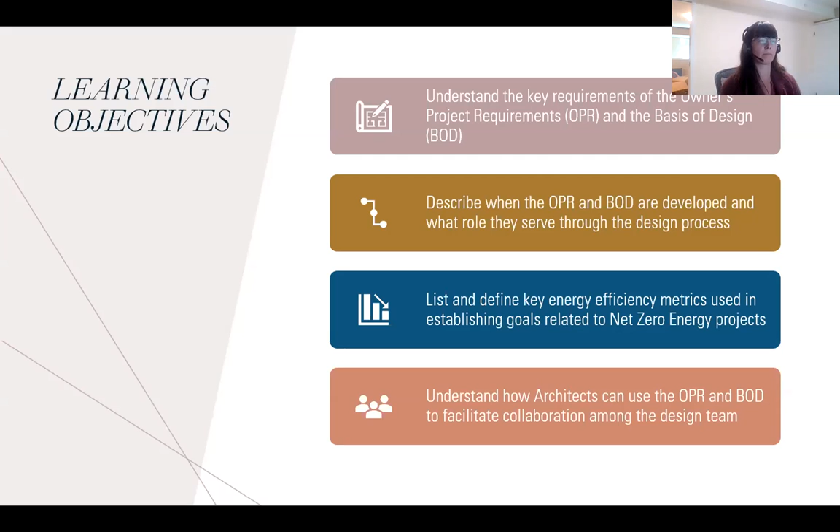I'm just going to briefly tell you about Janika's background. Janika has I think about 12 or 15 years of experience in the sustainable building industry at this point. She worked as an architect for 8 years, including at EHDD. She has worked on a lot of zero net energy and LEED platinum buildings, including the Packard Foundation, the Exploratorium, Andrew Science Hall at Pomona College. Prior to working at Integral Group, she had a position at the University of California Office of the President, leading efforts on climate action planning and green building policy and implementation. I could go on.

She's been at Integral Group for several years now, and Integral is kind of an engineering firm that does a lot of stuff beyond just engineering, and works with a lot of architectural teams and building owners to sort of tie the groups together. And that's really Janika's strength, as an architect who has a lot of interest in technical topics. She's really about getting the team to work together. So with that, I'm going to turn things over to Janika. She's got a lot of stuff to cover in a relatively brief amount of time.

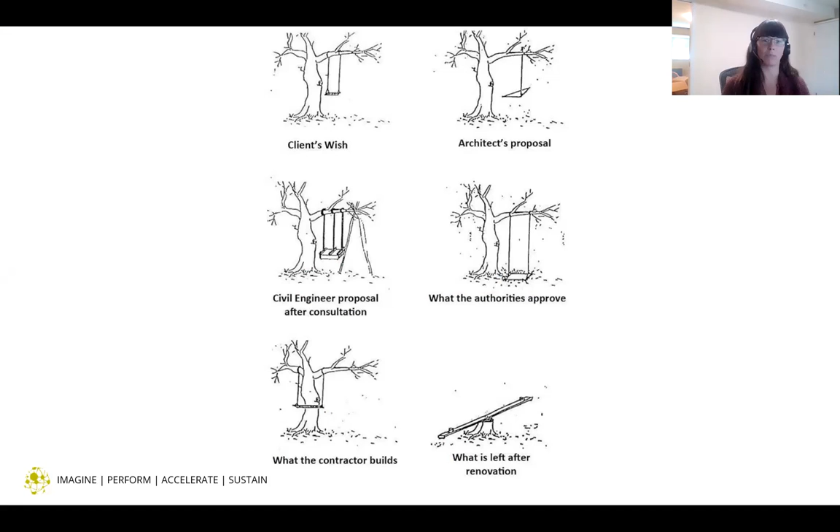And recognizing that projects today, there's so many pressures, pandemic aside, there are already so many pressures on our work in terms of cost escalation, just the system complexity. We went from having a basic internal combustion engine, to use the car analogy, to now smart cars with all kinds of computers. Buildings are very similar. There's just so much complexity to buildings now. How do we actually make it happen in a realistic way?

There's more and more third-party certifications. Sustainability goals have gotten more aggressive, thankfully, but also more challenging to meet. And schedules are getting just more and more compressed. I'm just shocked working with architecture teams now on projects to see how little time there is to actually do the work you need to make good decisions. So all of these pieces make integrated design actually even more valuable.

And really, integrated design is simple in its sense. It's bringing together experts in multiple disciplines from the very beginning of the project. That's key. Want to start as early as possible to identify and achieve shared project goals through collaboration. We're not talking today at least about integrated project delivery, which is IPD, you may have heard. It's a very specific sort of template and process that's used for especially complex projects. It's similar, but has more of a structure to it in terms of how it's actually done. But there's lots of resources out there if you're interested in finding out more.

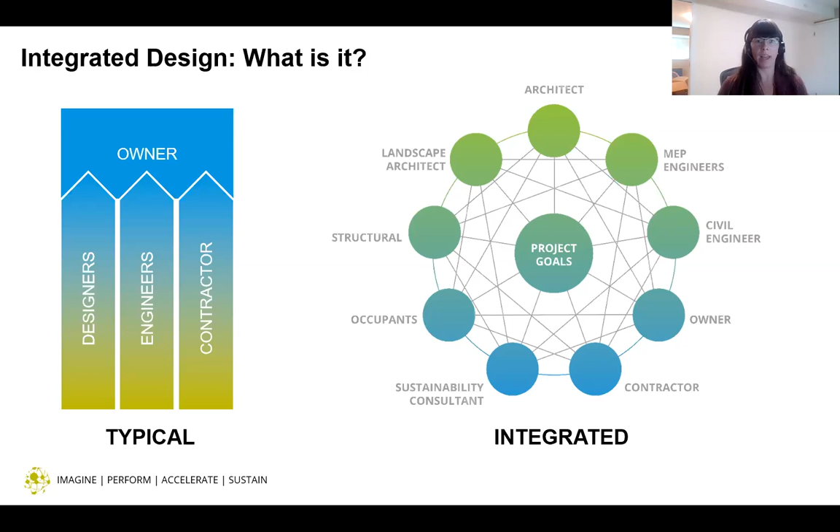And sort of characteristics are that this teaming is really highly functional, aligned around these project goals, that the collaboration is happening in a fruitful manner, that there's lots of iteration and feedback loops, so that we're not just all going on a straight up trajectory to the deliverable, we're actually acknowledging at certain points, oh, we need to investigate more. So I think architects are really great at this. This is what we're trained to do, we don't have a linear path to a solution.

We go around and around, and it's really inviting our consultants in and our clients into that process as well, so that all aspects of the project, or the major aspects of the project, can have a similar kind of iterative approach. So you're really finding the best answer, best solution for the project.

And when you look at, especially for high achieving projects, if you're pursuing net zero energy, for example, there are so many factors in here that just require a more engaged collaborative team. One discipline can't figure this out on themselves. The MEP engineers can't figure this out for themselves. It needs collaboration with the architect, with the owner, with landscape, etc.

And at least from our perspective at Integral, we're really looking to do more with the building, which is great for architects. We're trying to shift cost from mechanical and electrical into the architecture, because the architecture really is the first mechanical system. If you can design the envelope and the building well enough to reduce the load enough, then you're essentially taking pressure off the mechanical and electrical systems to do the work of heating and cooling or ventilating your building for you.

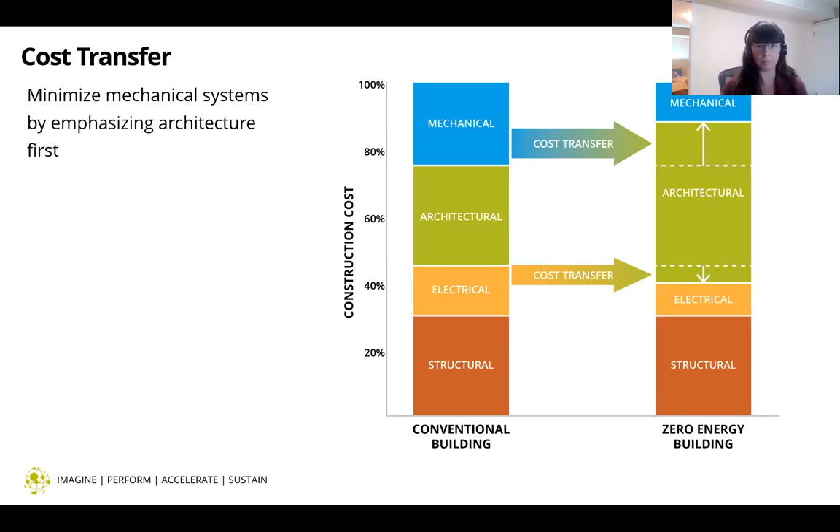So by having an integrated design process and some higher performance or sustainability goals, you can really start those conversations at the early phase to figure out what are the key strategies that the architecture can do to make that happen. Another key component of integrated design is to look at the whole design process for opportunities to use analytics and use your team to inform design decisions.

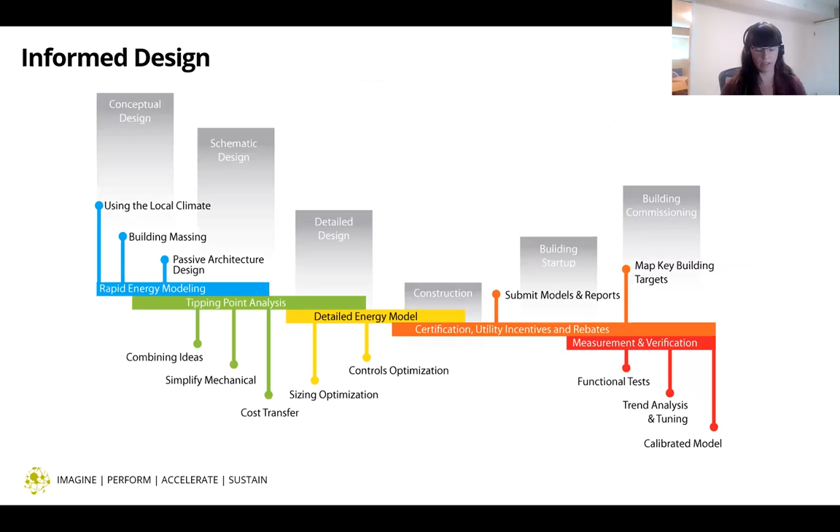So especially when it comes to energy modeling, we often see that the sort of traditional MEP work happens more in design development, construction documents, that maybe early on in concept, there was a shoebox model or something that one of your architectural staff was able to pull together to look at shading or orientation or something, but then it kind of drops off, and then really in DD and CDs, you're just looking for compliance or looking for an updated LEED model, that the energy modeling at that stage isn't informing the design.

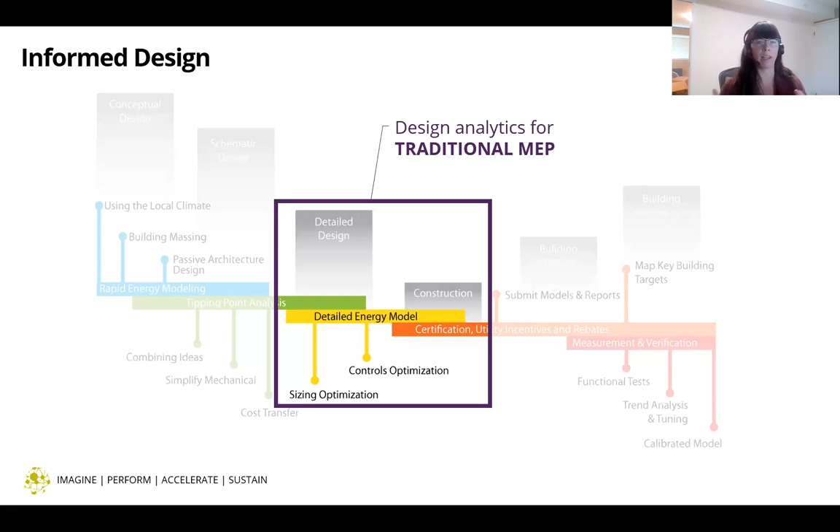But what we're looking for with an integrated design process is to use your analytics capacity in your team to test ideas throughout design, not just in concept, not just at the end before permit. It's a small upfront investment if you can expand that scope compared to the mistakes that can be made by committing too early or too late to a bad idea or finding out in construction documents that your whole shading scheme doesn't work, or

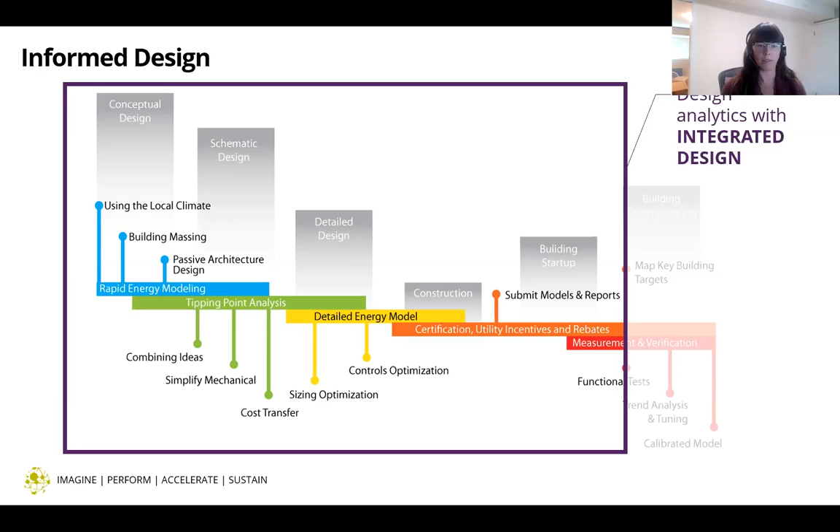I'm trying to think of another example, but it's super useful if you can at least build in concept and SD and DD an iterative approach to modeling. So it's not just compliance, you're really looking to solve problems. So I just wanted to share an example of that, where we worked with an architect client in the Pacific Northwest who had this shading scheme that was quite complex. It was part of their design intent, but it was also serving a purpose.

We knew this particular jurisdiction had really aggressive energy use intensity targets for each project, as well as thermal energy demand intensity targets, which means that we had to really watch how much solar load was coming into the building and what the heating demand requirements were for the project.

So we had been assuming the shading component was part of the project from the beginning in order to meet these city requirements, as well as integrating it into a natural ventilation and radiant ceiling approach. So it was all very much layered and nuanced in the design.

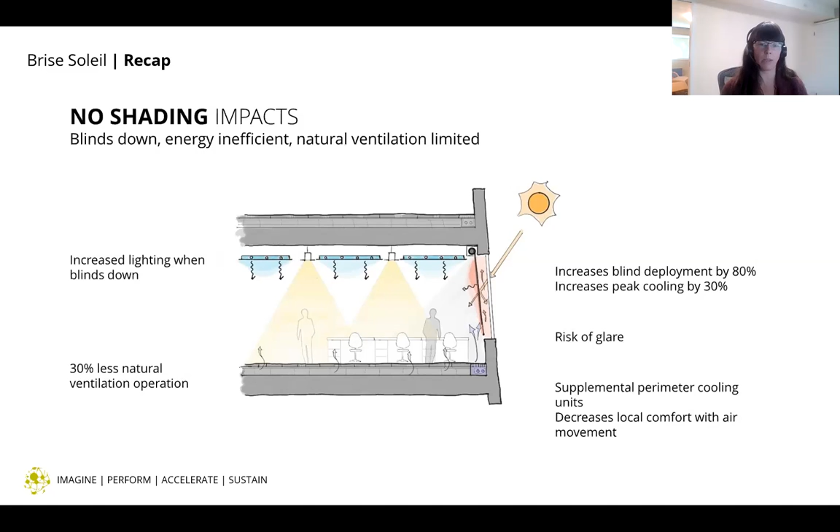But at a certain point, because of VE and client concerns, we had to really demonstrate that the exterior shading component was doing why it was needed, essentially. So we used the analysis that we'd already developed to try and develop a story around why it was so important and explain how all these nuanced layers of the building and its systems were so necessary.

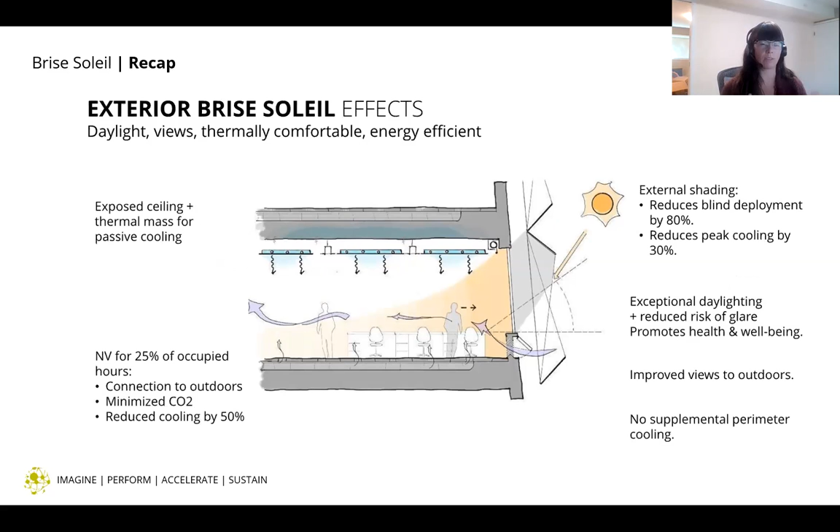So we use diagrams a lot. We try and explain in a more narrative fashion how the different pieces of a building work together, and then also used just the metrics that we had available of what the impacts would be to the building on the cooling load, on how often the blinds would come down, how that would affect views and daylight. So some of these more qualitative experiences of the user, how it would impact our natural ventilation scheme, and then what the impact would be to the mechanical systems.

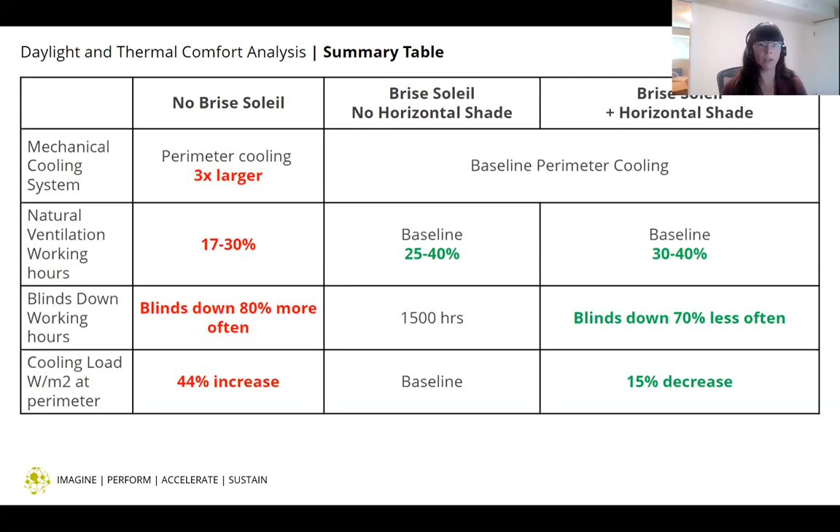So if we didn't have the brise-soleil, for example, the perimeter cooling would be 3 times larger. So that has a cost impact. Then we also used our daylighting analysis to help tweak the exterior brise-soleil system so that they had this module that kind of replicated over the facade, but it wasn't tuned to orientation. And the shape of it was causing some glare issues for users.

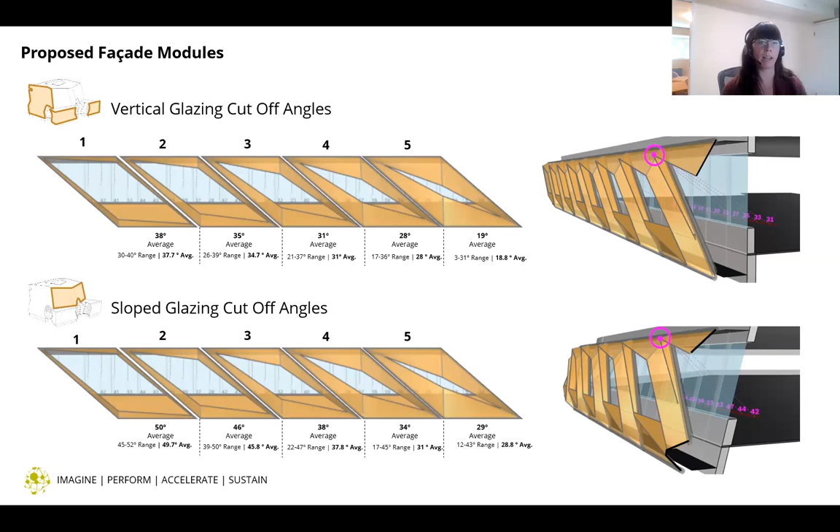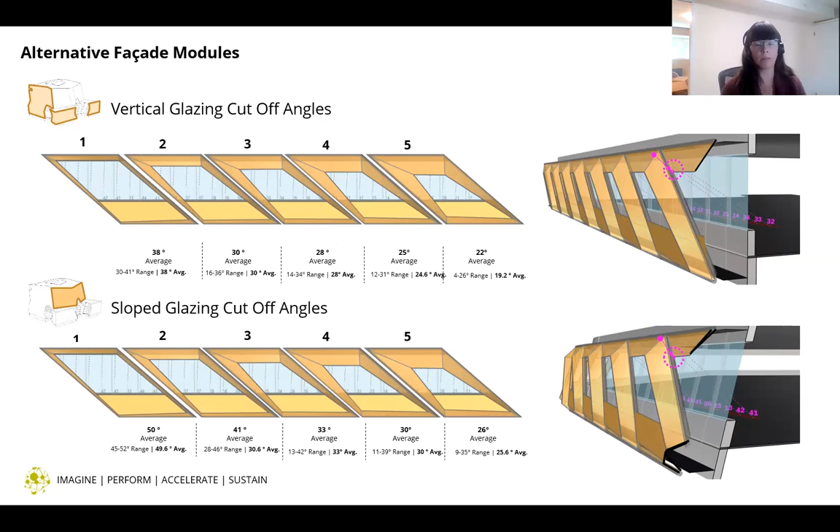So at the same time as we were reanalyzing the facade to make sure it worked for the mechanical system, we also reviewed the daylight and the thermal comfort component of the brise-soleil. And we were able to come up with some suggestions of how that might be tweaked to better perform for the architect to consider, as well as how it could be rolled out on the facade in different ways.

Because on the east facade, we had more flexibility in terms of what shapes would really work, how much sun you could really let in and still get the right performance that we were looking for. But that was going to be different than the southeast facade.

Sorry, I have multiple screens, so I'm going to look at another screen for a second, where you all are.

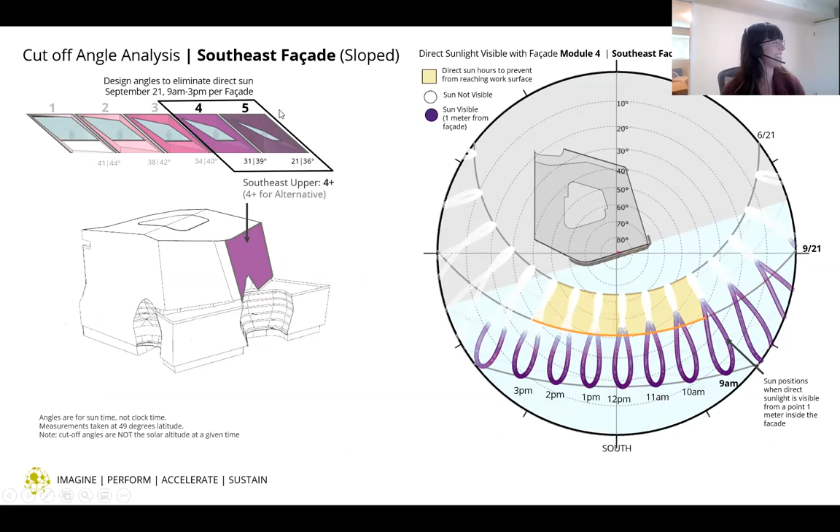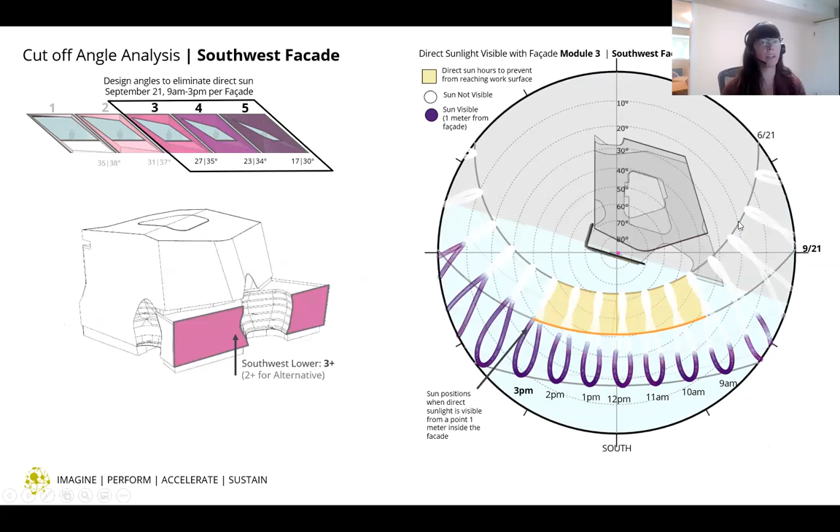You can see here that these 4 and 5 modules would be great for the southeast facade, but on the east facade, we could have more. And then it would be different on the southwest facade. So this type of analysis in DD really helped the architect tune their solutions to not only meet the client's need to understand why this was important, but also to get the facade to work as best for the project as possible.

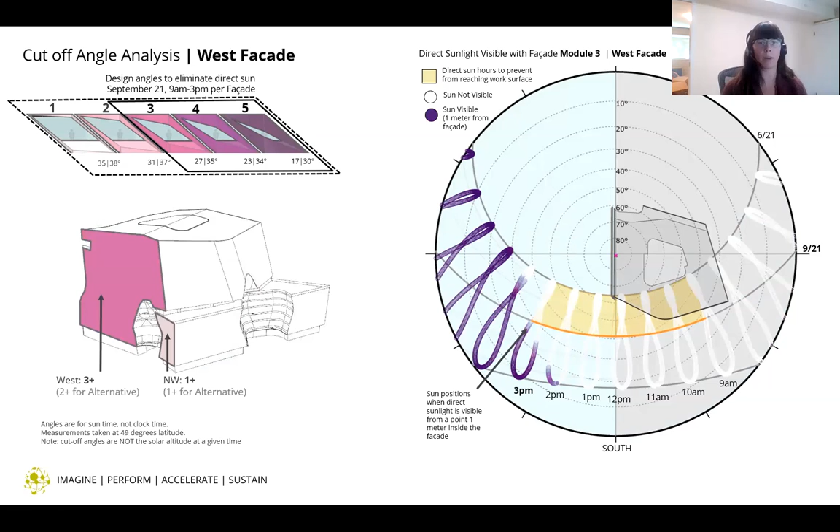So ultimately, it's trying to use the tools and the information you have available to describe how everything works together so you don't lose your design intent, either from an architectural perspective or from mechanical, electrical, plumbing's perspective, or even landscape, civil, all of our other consultants. I'm certainly speaking more from the engineering and architecture side today, but there's lots of ways in which these same principles apply to other disciplines too. It's just, how do we describe why we're making these decisions in order to justify them and to help everybody understand the implications for their disciplines.

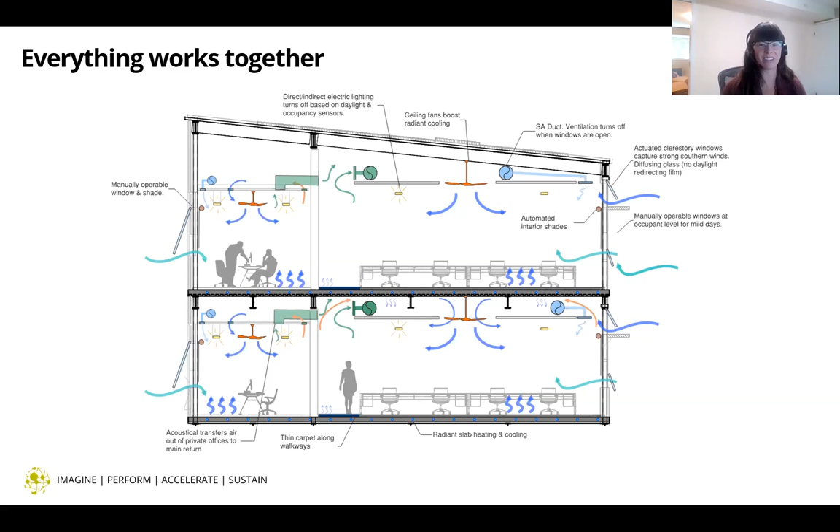And in terms of how to do it: architects as conductors. I think that we are in an excellent position to know when to lead and when to support others in leading. If you can tap into the unexpected enthusiasm about an issue that comes from a consultant team that may not have direct control over that particular scope, but has a real interest to help lead it in resolving it, that can be a really useful tool. So essentially empowering others to lead on resolving an issue.

You as an architect have the broad brush scope of understanding what all these pieces are, so you can help find the value proposition for clients and advocate for that additional scope for the analysis you might need, or for the piece of the design that is more complex but exciting, that has real value to the project. Find what the value proposition is and advocate for it. Use your consultant team to help fill that in and flesh it out for the client or the contractor.

If you don't have an example yourself or don't know, find the consultants that do. So if you haven't done a higher performing project before, but you really want to, find the consultants that can support you in doing that and are used to working in this kind of iterative way. And so as an architect, you know who to call on, who to bring together. Really importantly, what questions to ask, where the gaps are in the design, and how to follow up.

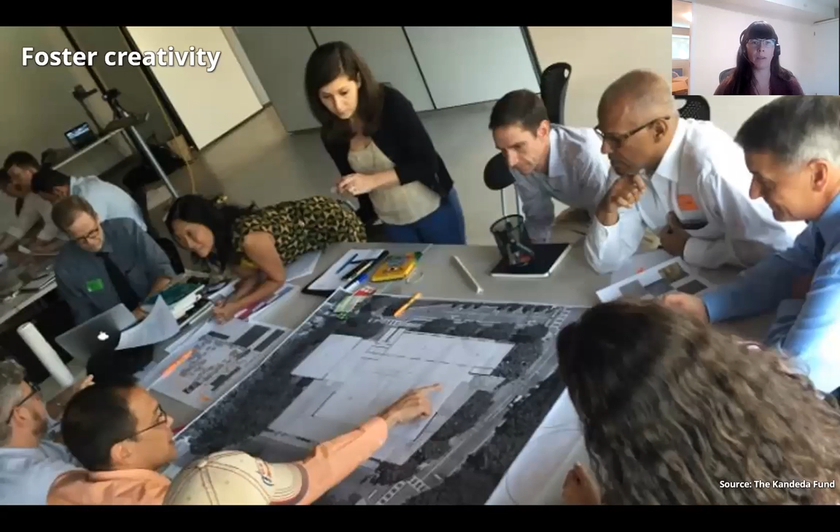So it's a mix of project management as well as sort of lateral thinking that I think architects can really drive the integrated design process in an effective way. It's also super important to set up a team culture within this project team that fosters creativity. So not only within the consultant team, but obviously within your own design teams. Just how do you think more creatively and more deeply about a project and potential solutions?

That you're holding everyone responsible for success. So there's no void of responsibility. So figuring out what is the scope of the project, what elements are going to be really championed by who on the project, and helping others feel empowered to step into gaps too. That you really want team members to feel like they have a voice regardless of their scope, that they can bring best-in-class ideas even if they're not the prime consultant.

And some way to reward the innovators. And sometimes that's as simple as just talking them up to the client, or just saying that Julie had this great idea on a team call. Just giving them acknowledgement can be a huge lift to team members feeling like they can actually contribute in areas where maybe they wouldn't typically.

And I think a great example of an integrated design solution that just requires a different approach than business as usual is something like alternative water sources. If you're looking at a site and wanting to integrate some alternative water reuse system, you have rainwater, which is civil, landscape, architecture. You have obviously plumbing if this water source is going to be coming into the building. You have the owner, which has implications to how occupants might interact with it, or maintenance considerations.

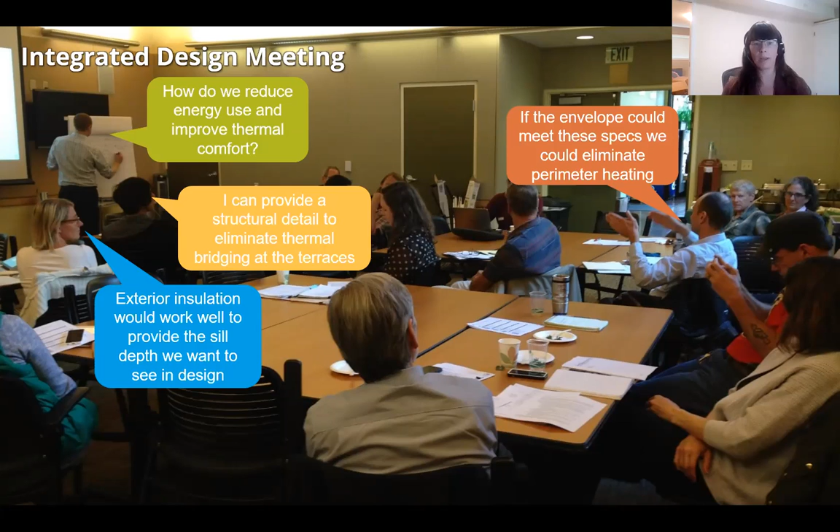And I just threw these in here in terms of tools for online collaboration. I'm sure all of you have a lot you could offer and what you've learned that works and doesn't. But obviously this is a lot harder to do in a virtual world. Especially for these more complex meetings or workshop-y kind of topics, I require that all team members use video. I really try and keep meetings small or use breakout rooms. I like, at least in the Zoom platform, to have 12 and under participants because that's just one screen gallery. So if it's possible to keep your meetings smaller, break up larger meetings into smaller components. Don't go more than 2 hours because people get exhausted.

And to really call on people. So go around your virtual room and make sure everyone contributes more than once, ideally, and find collaboration tools that work. One of the benefits of our new virtual environment is all of these amazing tools that are out there. And I'm not advocating for Mural or Miro in particular, but they're just examples of online sticky boarding, brainstorming tools that can really help. And you can have an interactive component as part of that. So it's also a great way to document the process. But no matter what, keeping clear notes about how especially these virtual meetings go is super important.

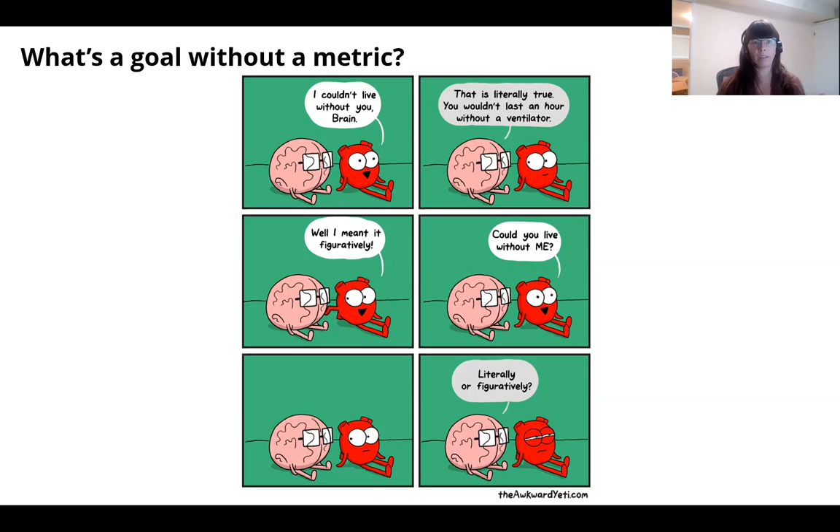Zero energy is a metric. We want to have an annual net zero energy for this project. That's a goal and a metric, as much as can be written in the OPR, but then also in the BOD to explain how the project is going to be evaluated for success ultimately, and to measure whether the design is actually meeting the intent of the project.

So it's important, because integrated design means engaging the team in a different way than business as usual, which means using these tools to your benefit. It's also really important to leverage the role of the commissioning agent early on, so that they're not just coming in late to sort of clean up the pieces with the OPR, but they are informing the basis of design and the systems as much as possible early on.

As I mentioned, it helps orient new team members and document design decisions and protect from value engineering. So this is especially important for the high performance projects or the highly sustainable projects that you have something that describes why the design is as it is.

And why does it never work that way? They're not typically bid documents, although in some contractual organizations they actually can be, but there's murky ownership. It's unclear who actually owns them. It's time and money. It's additional work for the team to actually do. They're not riveting. It's really hard to get excited about writing a BOD narrative.

Projects, again, take years and people come and go. So something might get started and then it gets dropped. They can be way, way, way too long or way too short and too vague. They don't get updated. They're written too late in the process, so it did not have any benefit. And the language is really generic.

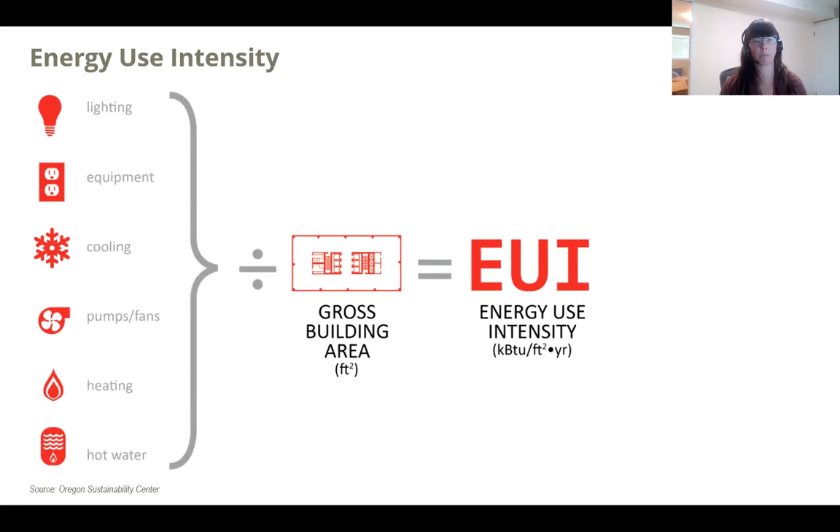So with an EUI, you're looking at the whole building energy use. So not just what's covered by code, but all of the uses in the building, including your plug loads. So my phone plugged into the wall, the printer, the monitor, etc., that wouldn't normally be captured by code is captured in the whole building energy performance target. And this energy use is divided by the square foot of the building to give you a measure of how this building is performing that you can then benchmark to other buildings.

So how we use that in design is by taking benchmarks from other buildings that the client might have or that we might have worked on, comparing to code, comparing to a LEED baseline energy model, comparing to a net zero energy target that we might have, and then where we think the project could go. So we typically break that out by end use and end use energy use, and start to see, well, heating's our dominant demand, so we really want to target that. Or lighting maybe is the problem, whatever it might be. Doing this kind of early analysis can really reveal where the opportunities are and where your potential targets might be.

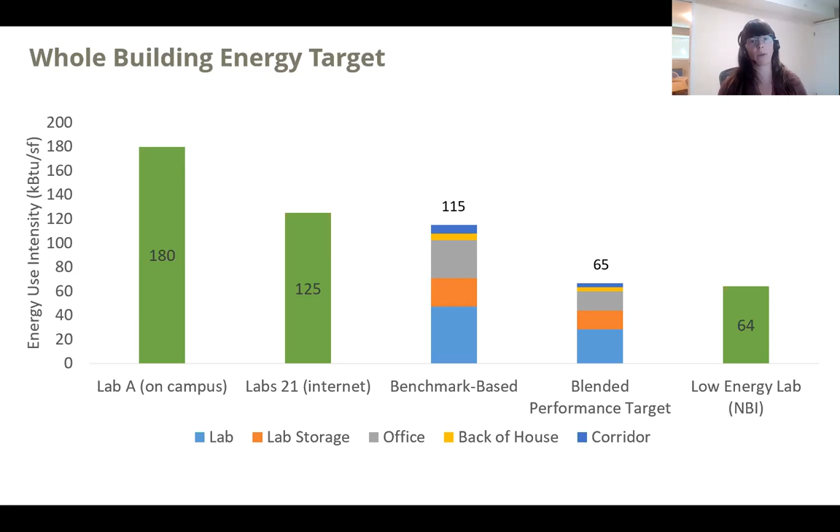And you can do this in concept. As I mentioned, there are lots of tools out there that can help you at least do a rule of thumb. Where do we think we can go? How far can we go on this project? So there's lots of places to find a benchmark EUI. The Architecture 2030 Zero tool is a great way to do that. Energy Star Portfolio Manager: both of those tools use CBECS, the Commercial Buildings Energy Consumption Survey, which uses existing building energy use data and compiles it by building type.

And you can change the levers to say, I have a 20,000 square foot building, it's a K through 12 school, it's open 5 days a week, etc. You can tailor it a little bit to then get a potential energy use target. And with Energy Star Portfolio Manager, you can set a percent of benchmark that you want to achieve. So for Architecture 2030, I believe it's 70% of benchmark. It's a little confusing because it's backwards, but that means it is 30% of the benchmark value.

So all of these different tools can help you at an early stage, and anybody can do this. Architects can look up an EUI and get a sense of what you might want to target, but clients can too when you're looking at an RFP. It's especially useful if clients have existing buildings to benchmark and then set a target based on that. The University of California has done that. The state of California has done that. We have a number of commercial clients that we've worked with to develop that specifically for their portfolios. So wherever you can gather the context of energy use for a specific building type, that will help you set your goal for the next project.

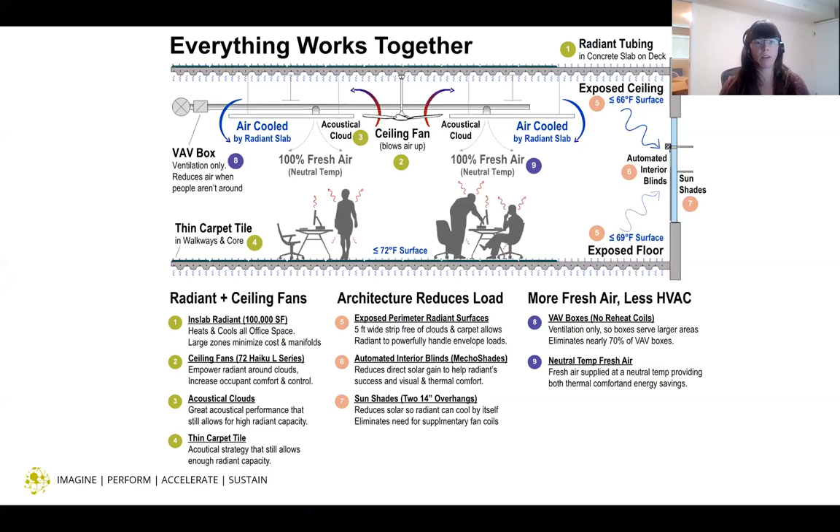And that also required a set of meetings with different consultants or different team members to help inform the performance of the radiant system, because the radiant tubing goes in the structural slab potentially. So how does structural approve of that? And what do they need in terms of information from us about tubing placement, etc., needs to be discussed early in the phase.

For acoustics, for radiant systems, you typically need to have the radiant surface exposed to the occupants, which means if it's in the concrete floor, ideally you don't have carpet all over it, or you just have carpet in strategic places, because the carpet dampens the effect of the radiant system. You need to talk about that with acoustics, because obviously carpet and ceiling clouds, etc., are important to maintain good acoustic quality. So how do you actually find a balance there?

For the envelope, you want to limit solar gain, especially in the climate zone of San Francisco, where the project was. So, what is the facade going to be? How much window to wall ratio? What external shading is going to be possible? What is the glazing type? Need to work on the modeling of that to understand the implications for the radiant capacity and whether it can meet the demand of the load for peak cooling loads, etc.

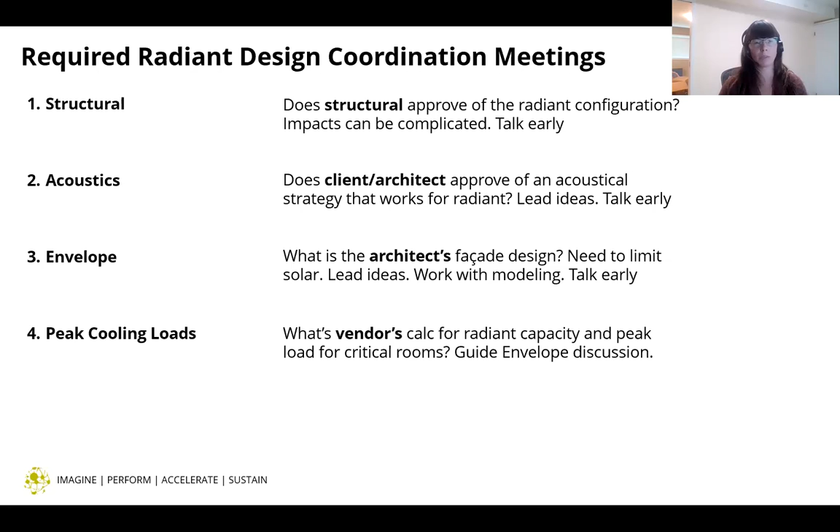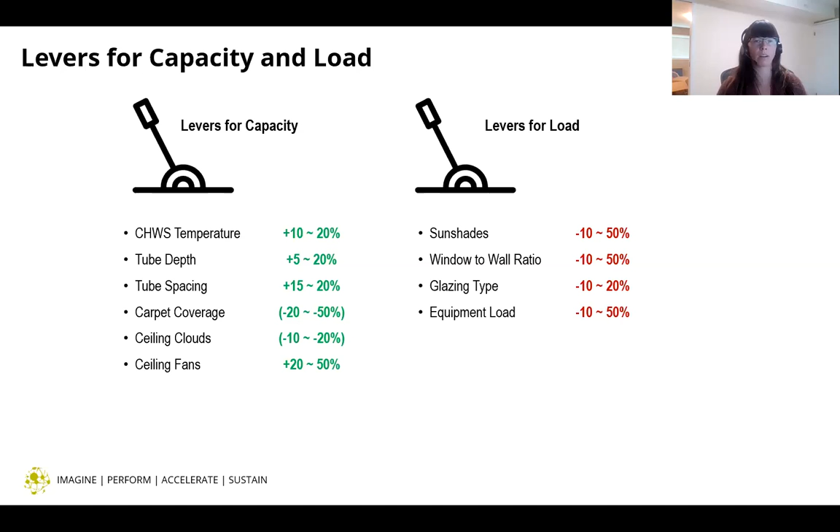So all of these pieces were meetings that happened, multiple meetings and multiple conversations, so that everybody really understood the levers that they could pull in terms of still meeting the goal and meeting the design intent. And for this project, they decided early with the net zero goal, their EUI target was 25 in order to meet the net zero capacity that the roof could carry in terms of PV. So the goal of 25 really set the boundary for how far the project could go above and below and still meet its net zero energy target.

So this kind of came all to a head in a conversation through modeling that we were able to provide an analysis of all the different carpet solutions, window to wall ratios, glazing type, and number of external louvers, all these pieces, how they played together to then drive the energy performance. So in looking at this, the architect and owner could then really understand, if they still want to meet that 25 kBTU per square foot EUI goal, which systems they would need to be able to get there.

So again, using information design analytics to be able to inform design and recognizing that all of these pieces have many different layered implications, that it's not just an energy conversation, it's an acoustics, it's a thermal comfort, it's an aesthetic, it's a budget. All of these pieces need to be addressed within these conversations.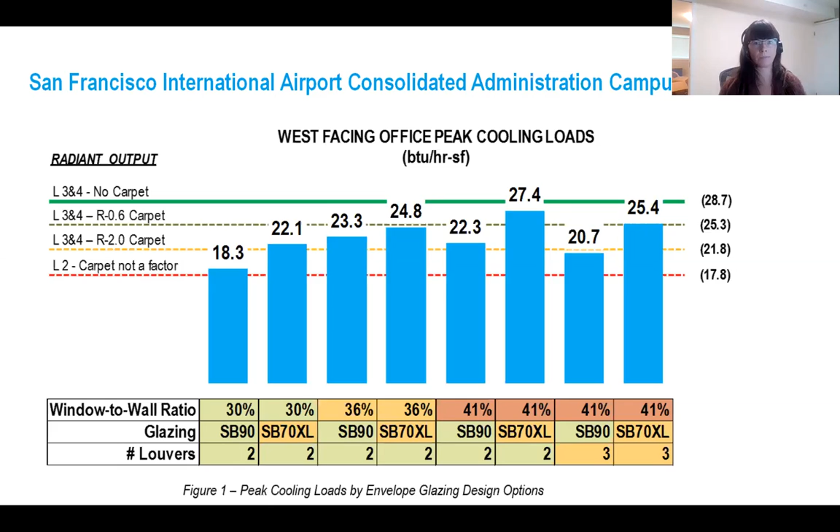And then I just wanted to briefly talk about how different delivery models can impact an integrated design process. And I just want to say that it can work in any and all different configurations. It depends on who's leading the project. You really need to know your audience and what they care about. The cost milestones are different between different delivery models, so that can be the biggest influence in how the pace of information and analysis might differ from project to project, and the roles and responsibilities can shift drastically.

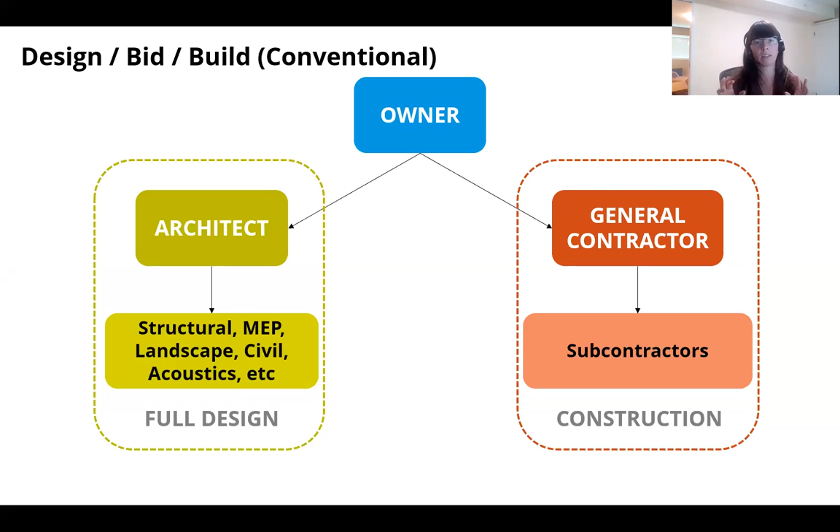So in a typical design bid build scenario, the architect holds the contracts for the full design, and the contractor's doing their thing and reporting up to the owner. And the architects in that case can really lead the integrated design process because they're managing the consultants directly and coordinating the messaging to the owner. Design team and contractor then have separate motivations though, so there can be some more cost challenges there. And particularly when you're not getting bidding until the end of design, that can cause more challenges too. But if you have the documentation of why a design is as it is through the OPR and BOD, then that can at least help in those conversations and those value engineering exercises.

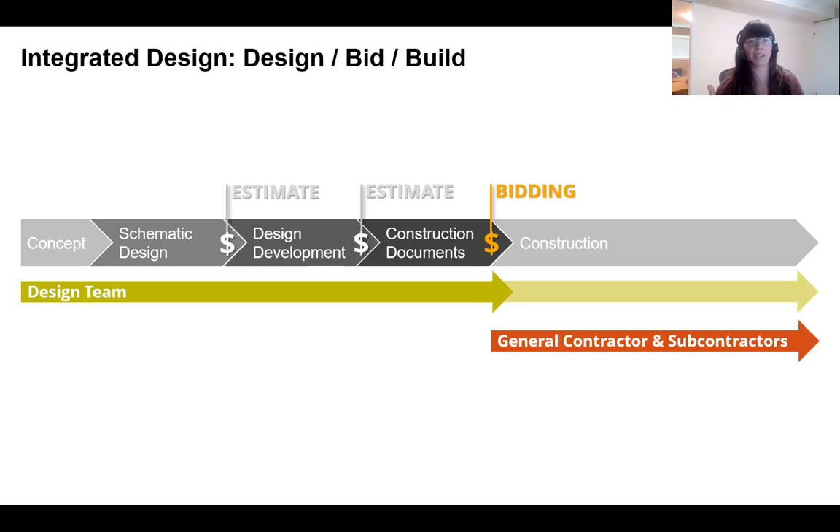With a design build project scenario, there's so many different flavors of design build. I won't get into them here, but essentially the contractor or the design builder holds the contracts for the design team. And the biggest challenge can be the handoff point when you're actually doing the bridging documents to the subcontractors, and then how much information is translated over to the subcontractors about the design and the performance goals, etc. So I think with design build, the BOD and the OPR are even more critical because there has to be that translation of the design drawings and the specifications into why these design strategies are in there and how they interact.

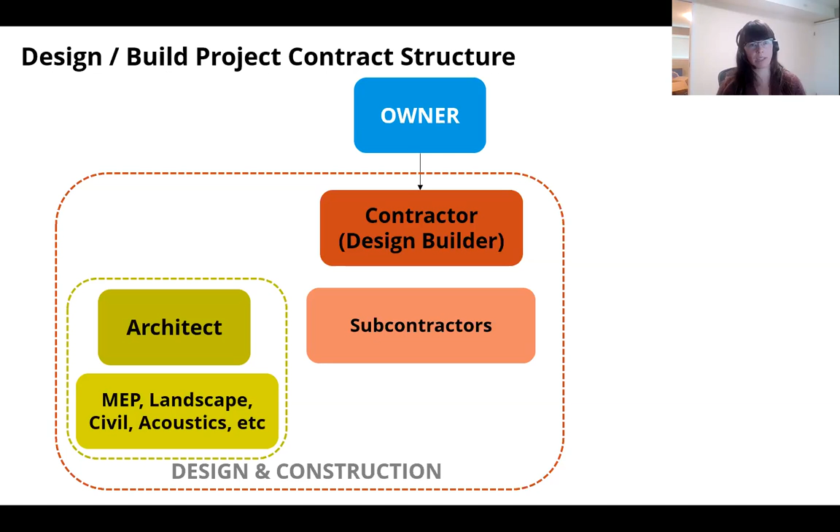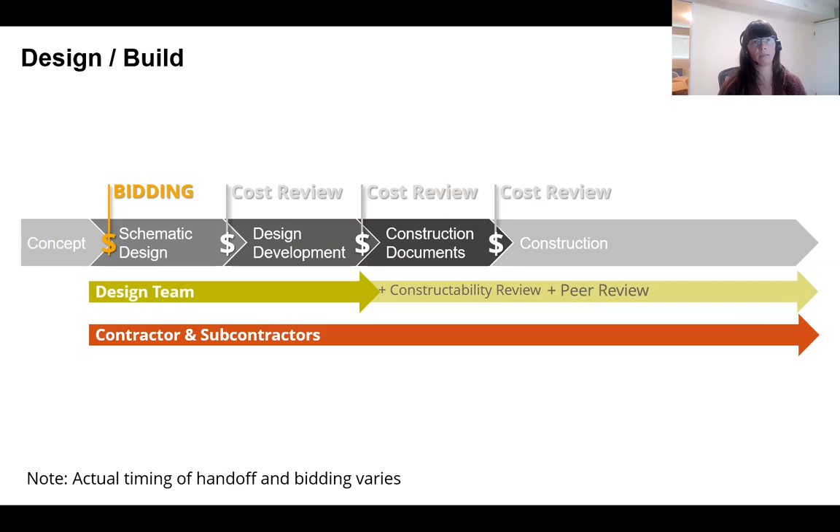So you can't just pull out the radiant system, for example. There's major implications if you do that. And design build too, with the cost pieces of it, it can be really great because you're getting earlier cost information to design decisions. So when you're using a sort of analytic approach to design decisions, folding that cost item in as well has huge value and can really give you a much more informed decision-making process if it's done well.

And then in design assist, it's even another layer of complication in terms of roles and responsibilities and how this actually looks on a project team. It's similar to design build with some additional layers and a lot more collaboration between team members, but some murky responsibilities, and it's really critical to map who's going to do what, particularly for MEP, because in this case, MEP will do the design and then hand it off to the subcontractors to draw, and the design engineers will stamp as the engineer of record. So there's an accountability piece that can be both good and bad.

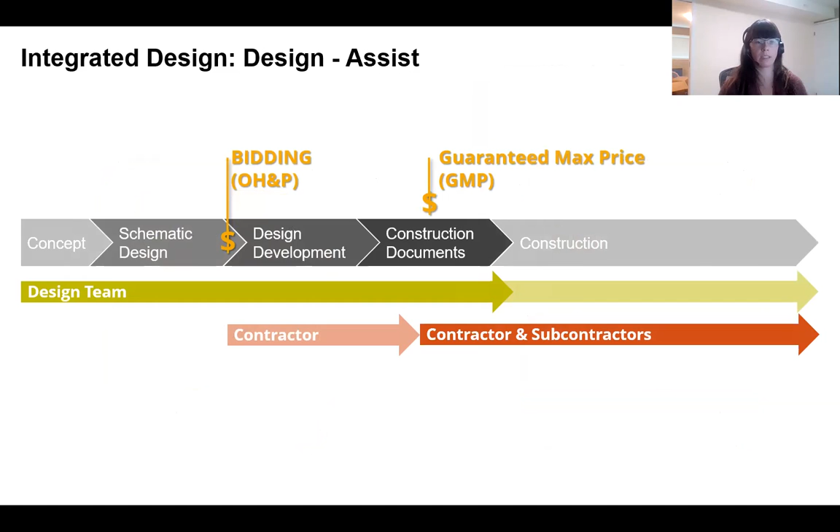And similar to design build, there's more early cost information and cost implications. So it can be a benefit, at least when it's done well, to get more information on design implications early into decision making. And just some key traits of each delivery method.

With design bid build, having the architect contracted directly with the owner, it's fully designed before the contractors are engaged. It's the simplest delivery method, but least opportunity for integrated design with the contractor. As a design team, it's great and allows you to really work through solutions in a much more in-depth way. However, it's harder to get that cost information and that contractor input unless you have pre-construction services, which could be another hybrid model.

In design build, having a single contract with the design builder for the entire design and construction scope shifts the risk. It really requires a defined scope from the owner. So if there's not a good owner project requirement, that can be a real challenge in a design build project to get a good result, if it's not spelled out at the very beginning what the owner wants. It's definitely more complex to manage in terms of an integrated design process.

There's less control from the owner and it's more driven by the contractor or design builder side. So their priorities can be really different, both plus and minus in that case. They can be much more informed than a typical owner might be, but cost is usually their primary goal. So that drives a lot of the conversations, and you have to really, as a design team, defend things in a different way.

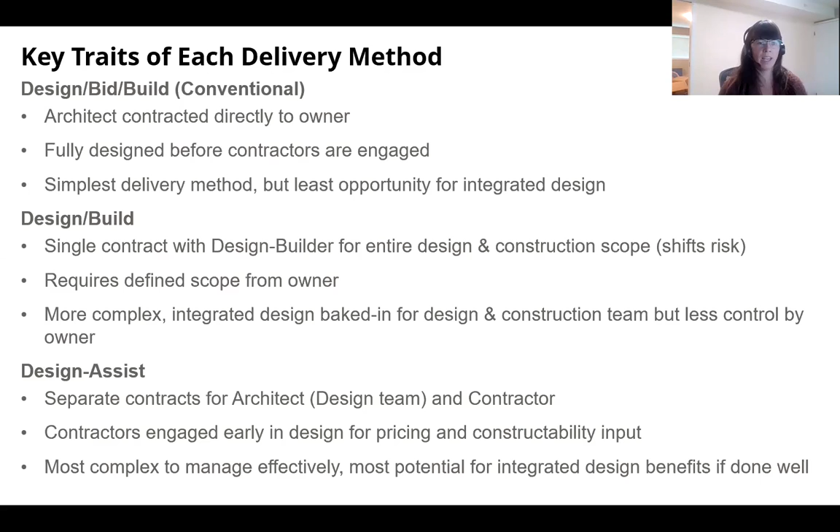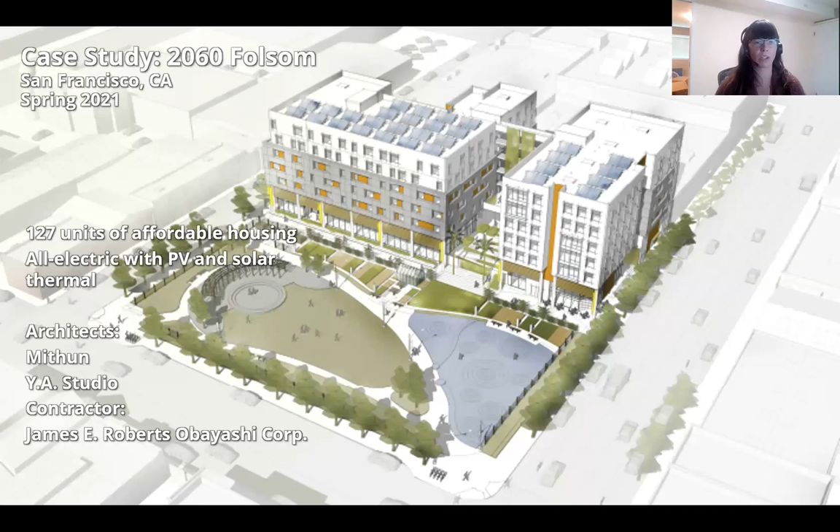And then I just wanted to finish up with a case study that tries to summarize the benefits of integrated design, to that question of what are the cost benefits. This project is in construction currently. It's an affordable housing project in San Francisco, done with Mithun and Y.A. Studio, and the contractor is Obayashi, and it's in the Mission. It's a really, really cool project.

It had a very complex and extensive project team that also involved a lot of city involvement, obviously, because it's affordable housing, but there was also a health researcher. The project is for low income and homeless families, as well as kids aging out of foster care, called transitional age youth. They're usually there for six months to a year with support from the county to figure out what's next for them. There's one to three bedrooms for families and studios for the youth. And on the ground floor, there's childcare and supportive health services.

For an integrated design project, the scale of the team is often in scale with the size of the project. But in this case, given there were numerous stakeholders, they were all involved from the very beginning. Especially with this health researcher piece, they had a particular interest in the indoor air quality of the project, because affordable housing projects typically can have very bad indoor air quality. So it was one of the early goals to tackle this on the project and then track performance through this health researcher involvement. So from the get-go at the early kickoff charrette, everyone was in the room.

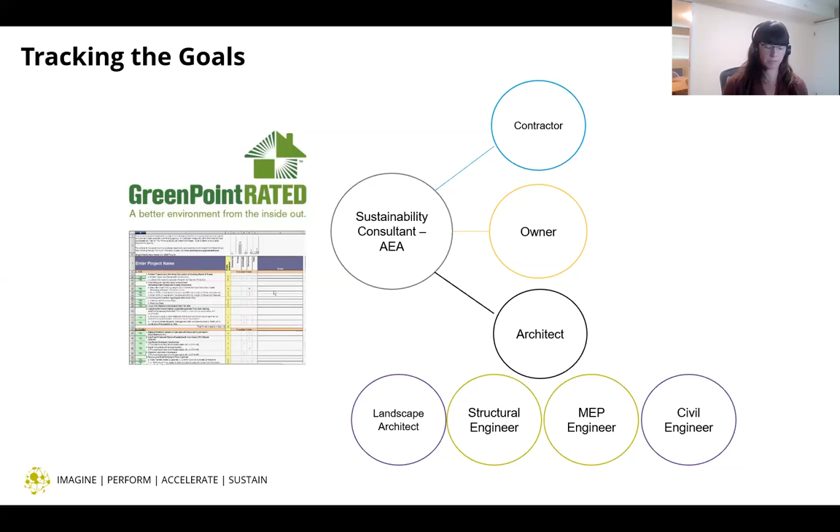So just another example of where you can leverage the team if you have a sustainability consulting service and are trying to meet a certification system, use the rigor of that process to help the integrated design process. So that single point of ownership was really helpful. It forced consultant teams to provide documentation at those milestone deliverables to prove that things were being met.

This project benefited because everybody felt really good about working on it. They loved the mission of it. So again, that integrated design circle of everybody around the project goals, this project was really able to develop that because of the mission-driven notion of it. Not every project has that, but whatever you can find that really can orient people to why they're part of this and why they want to feel good about it. But everybody wanted this project to succeed.

On other projects, you can really tie it to fees and contracts in terms of trying to motivate that enthusiasm, or other shared risk and reward structures. I've seen that for performance-based energy goals, which is a whole other conversation, can be challenging, but also can provide more of a carrot, pain share, gain share kind of models, or other ways to do it.

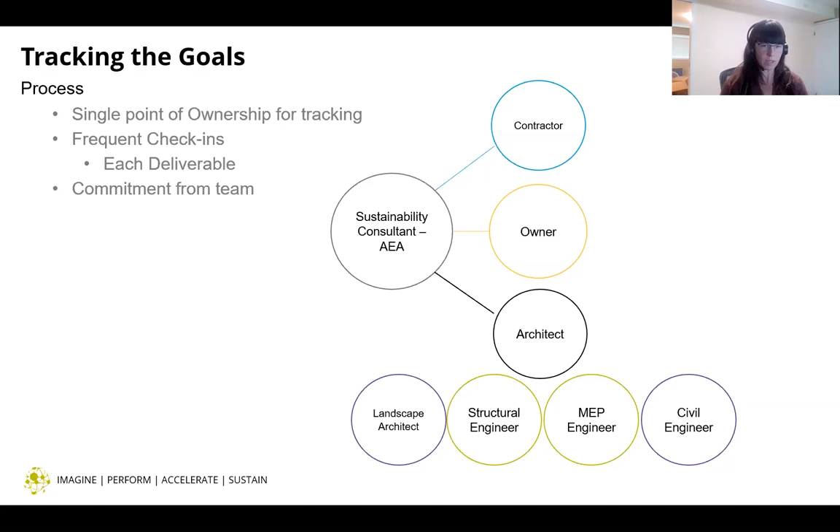So, can you actually get a better project from the extra work of integrated design? Absolutely. And one story from this project, I think, really illustrates that. So the client had typically used hydronic radiators and a condensing boiler, and they had previous projects with cost information to provide context on what that would cost. And the story of this project is really the cost transfer, that little diagram that I showed, moving mechanical, electrical into the architecture. That's what this project was really able to do.

So Integral Group asked for pricing on 6 different mechanical systems, and the contractor was able to price all of them because they were on board early, which was great. One was old school electric resistance heaters, which are becoming more in vogue now that electrification ordinances are showing up everywhere, and it's actually possible to do in the Bay Area in an energy efficient way. They're often associated with high operating costs and Title 24 issues, but the price difference was huge upfront. It was a $3.4 million difference between the hydronic radiator condensing boiler solution and the electric resistance heaters.

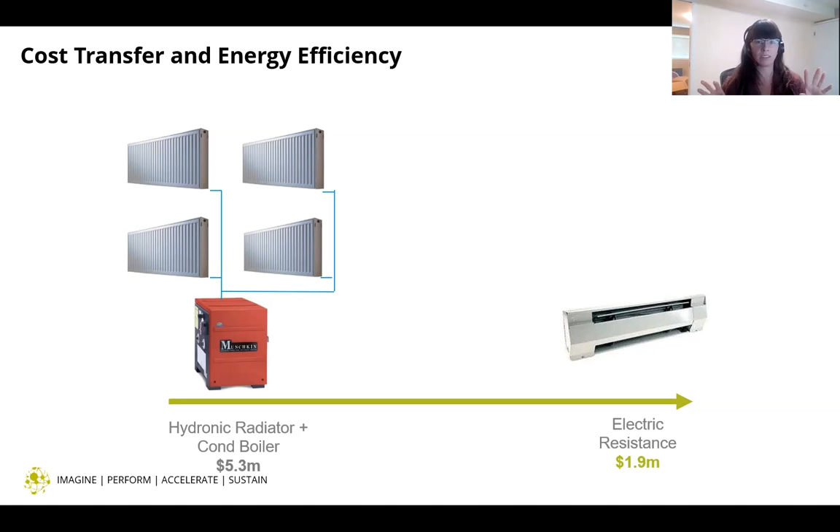So if you can save $3.4 million, what can you transfer it to? In that case, the envelope. So the typical 2x6 metal stud wall with 1/2 inch of continuous insulation, which would have been the standard for this project otherwise, has been associated with mold issues because typically affordable housing has higher occupancies than other typical housing projects.

And if we moved to a 2x6 metal stud with 3 inches of rigid insulation, exterior insulation, and using fiberglass clips to reduce the thermal bridging. So they use that with a rain screen. It actually reduced the number of electric resistance heaters that were needed.

And then in terms of ventilation, typically bathroom fans are used for continuous exhaust with maybe a trickle vent or something at the exterior wall. So it sucks air from the facade, but most of the air due to bad pressurization in buildings comes from the hallway, which isn't filtered, it's not outside air. So that's really what leads to the terrible air quality, is bad pressurization and those systems not actually working as intended.

So Integral Group proposed using an HRV in each unit, which balances the air coming in and going out, and it's all fresh air. So if it's a cool night in San Francisco, we have these great diurnal temperature swings, and the inside temperature is warmer than your set point, it'll actually do a night flush purge and bypass the heat recovery element. So you just get the cool, fresh air to help cool down the building. And the structure of the building is exposed concrete, so that gives you the thermal mass that further benefits from a night flush approach.

By increasing the insulation of the exterior wall, it allowed us to reduce the number of electrical resistance heaters and add in the HRVs. So even though the HRVs were a $3 million add, the HRVs and the continuous 3-inch insulation on the exterior still saved $400,000, and it uses about half the energy of a typical building this size. So I think it's a great story about how all of these different layers need to come together.

So there was the goal around indoor air quality, the goal around energy, obviously the goal around cost, and all of those pieces had different champions. So obviously the owner was carrying the overall goals of the project, especially cost. The engineers were really passionate about the net zero energy piece. And the researchers and the owners and occupants obviously around the indoor air quality, but everybody could come together and workshop the solutions to make sure that this was feasible in a way that would benefit the occupants, the owner, and the project overall.

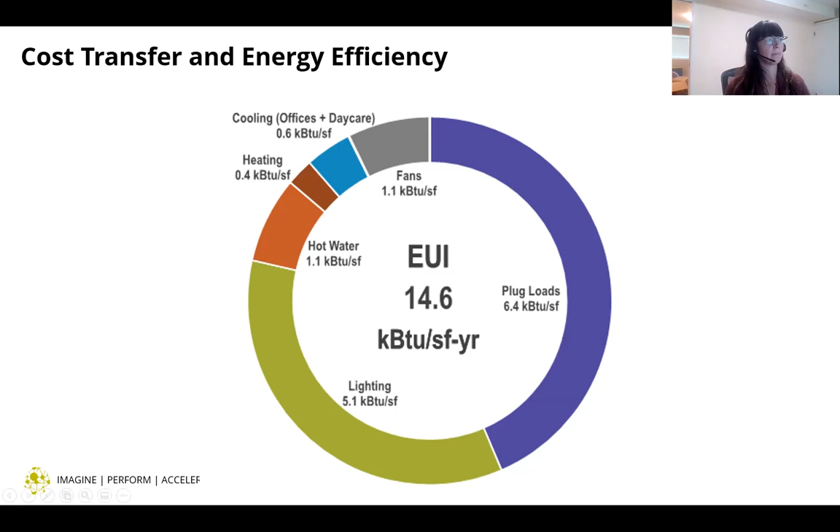Janika, this is Bill, and I'll just mention, I think you said this at the start of the discussion of that last project. A lot of that was driven by the maintenance people, wasn't it? That they actually felt that the electric resistance heaters would just require much less ongoing maintenance on their part than the hydronic system. So while there are many things about the hydronic system that we like, particularly in low-cost housing, the ongoing maintenance cost to maintain that system was perceived to be higher than the electric resistance heat. Yeah, that's a good point, Bill.

And I should also say that it also allowed the project to get off fossil fuels, so it's not a gas-powered project; it's all electric.

But yeah, there were multiple savings from a maintenance standpoint and an operational standpoint from going all electric.

Janika, another question that came in really had to do with whether or not you have a preferred delivery type. And I'll tell you, I actually wrote a reply, in which I said that you and I have spoken about this over the years, and that my understanding of your take was that it really depends on the building type, and it also very much depends on the owner's previous experience with building design, construction, and operation, so that the involvement of the owner and the degree to which the owner has experience, knowledge, and ability to